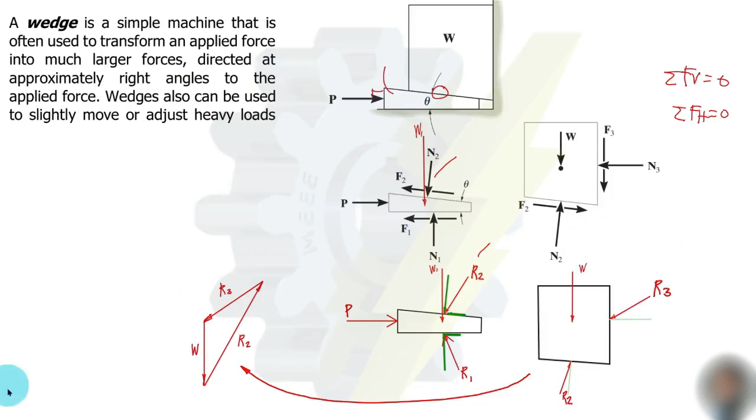Okay, so let us solve some examples. So our first example is from the book of Ferdinand Singer, problem 536, page 132. Determine the minimum weight of block B that will keep it at rest while a force P starts the block A up the inclined surface of B. So ibig sabihin ang impending motion ng ating block ay pakanan. The weight of A is 100 pounds and the angle of friction for all surfaces in contact is 15 degrees. So angle of friction, ibig sabihin yung ating phi.

So again, number 1, draw the FBD. So ito yung ating block dun sa taas, yung block A. So applied load or applied force ay force P. Wala namang given na magnitude to. Then yung weight ng A, so ito yun. Okay, so ang impending motion natin ay to the right. So therefore, ang friction force or yung ating resultant reaction ay ito. So i-resist niya yung force P.

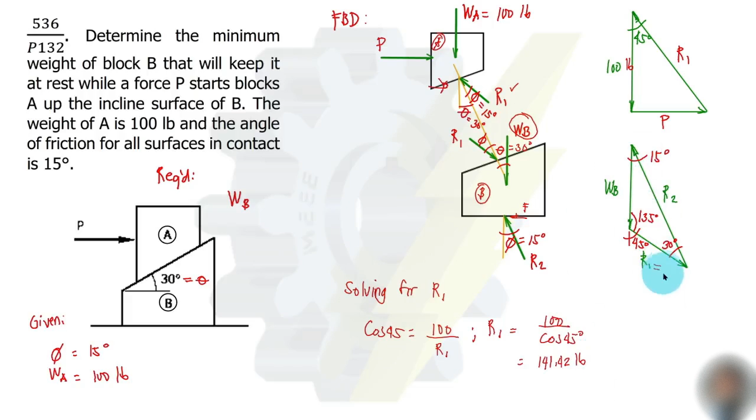Okay, so kung 141.42 yung ating R1, pwede na natin siyang gamitin dito sa force triangle ng block B. So, 141.42 pounds. The next, for WB, we can use sine law. Okay, so WB, yung ating unknown, over sine ng kanyang opposite angle, that is 30 degrees, equal to, so meron na tayong R1, 141.42 over yung sine ng kanyang opposite angle, so 15 degrees. So we can solve now WB, so that is 273.2 pounds.

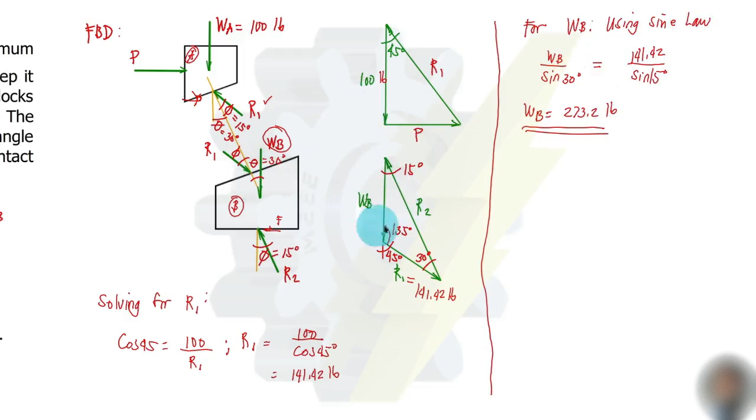Okay, so next problem. So again, from the book of Ferdinand Singer, problem number 541, page 133. Determine the force P required to start the wedge shown. So the angle of friction for all surfaces in contact is 15 degrees. So ang required natin dito ay yung force P and then yung given, yung angle of friction again, 15 degrees.

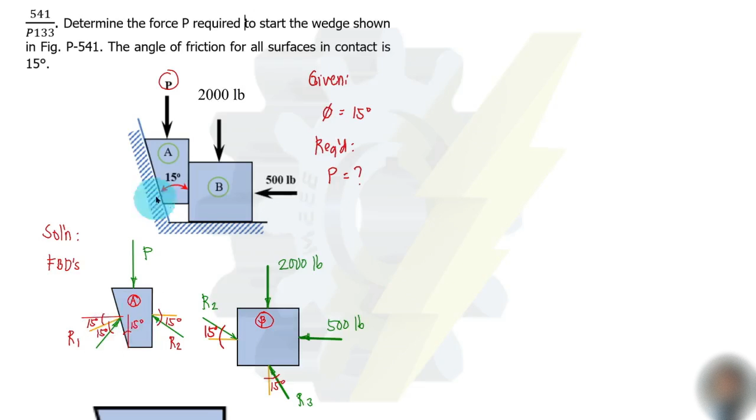Okay, so yung angle of inclination ng edge niya, so 15 degrees. So, kung isosolve natin yung angle doon, so basically, ito horizontal line, tapos ito vertical line. Okay, so kung ito 15 degrees, so therefore yun ay 75. And then from that, since normal line to, 90 degrees to, 90 minus 75, 15.

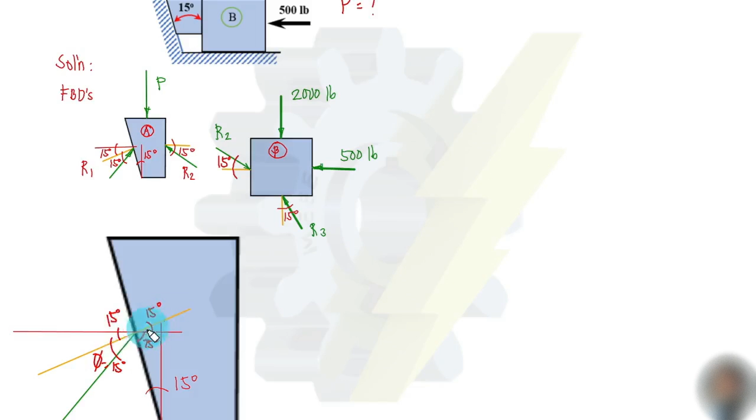So therefore yung angle nito, vertex angle, equal lang. So 15 degrees din to. So okay na tayo dito sa FBD ng block A.

Then kung dito tayo sa block B, so yung forces na involved, again, number 1, yung reaction kanina dito, yung R2, yun yung magiging applied force dito sa block B. Okay, so yung direction niya, baguhin lang natin. So ito siya, yung R2. So angle of inclination with the normal line is 15 degrees. Yun yung ating angle of friction.

So ngayon, yung reaction dito sa surface, therefore, so ito naman siya. So ito yung ating normal line, then ito yung ating angle of friction, 15 degrees. So let us denote this as R3. Okay, so ang objective natin dito, solve yung force P.

Pero dito sa block A, hindi tayo agad-agad makakapag-solve ng ating unknown na P kasi wala pa naman tayong either R1 or R2. So, kailangan natin i-solve yung R2 dito. Yung R1, di naman natin masasolve yan. So, yung R2 masasolve natin dito sa block B.

So, pwede natin i-start yung solution dito sa block B. So, ito, apat yung forces na involved. So, hindi tayo agad-agad makakapag-drawing ng force triangle. Pero possible pa rin gumamit ng force triangle by solving yung reaction or resultant nung 2,000 tsaka yung 500 pounds. So, isolve nyo lang yung kanyang reaction dito.

So, gamitin na lang siguro natin yung ating summation of forces vertical tsaka summation of forces horizontal para masolve yung R2. So, solving for R2 from the FBD of block B. So, we can take summation of forces horizontal equal to 0. Let us assume to the right positive.

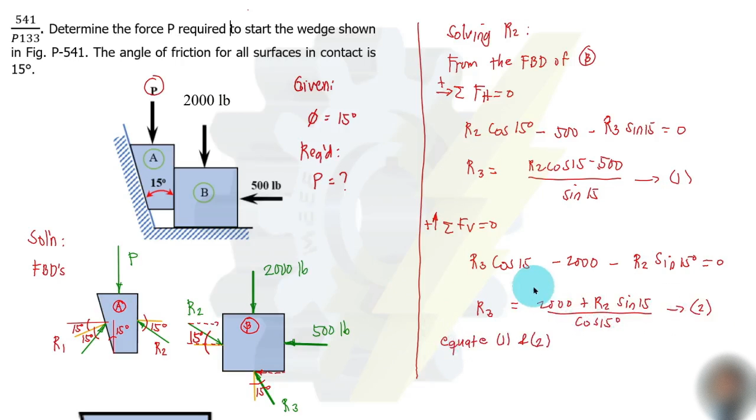Pero pwede rin syempre substitute yung equation 1 dito. So equate natin. So equation 1 yung ito. So dito pwede natin gamitin yung ating calculator. Pwede natin gamitin yung shift solve. Okay, so let us denote yung R2 na x na lang.

So alpha x multiplied by cosine 15 minus 500. Then yung right side ng equation, so yan ay 2,000. So yan, tapos na tayo sa right side. Then shift solve. So masosolve natin value ng R2 ay

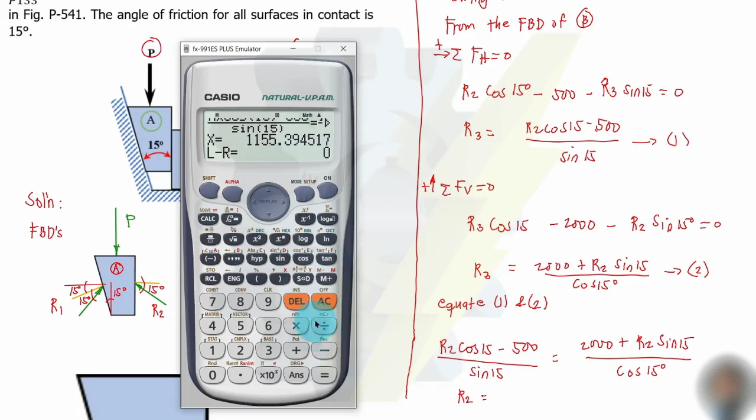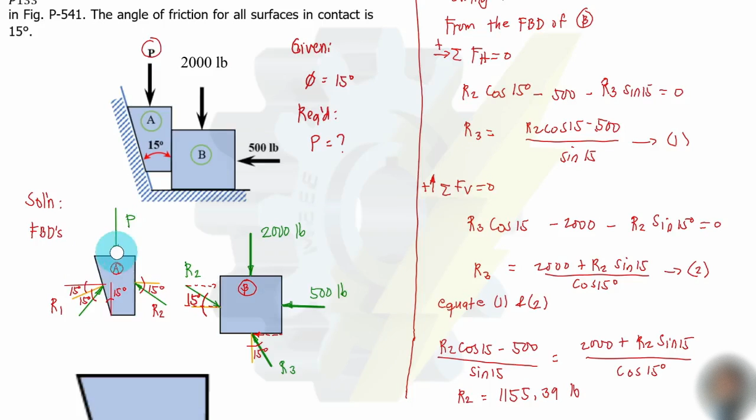1,155.39. So we are done with R2. So we can now solve for force P based dito sa ating FBD ng block A. So pwede natin i-drawing yung kanyang force triangle.

Okay, so otherwise, pwede tayong gumamit ng summation of forces vertical saka forces horizontal equal to 0 parang dito. And then equate nyo yung mga equation or substitute nyo yung isang equation dun sa kabilang equation para masolve yung force P.

So gamitin naman natin yung ating force triangle. So mag-drawing na lang tayo ng force triangle and then we can use sine law or cosine law. So given naman yung mga angle of inclination. So start tayo dun sa force P pababa, then yung R1 up to the right, then yung ating R2.

Okay, so yung P ito yung ating force P, then ito yung ating R2 equal to 1,155.39. So ito yung ating R1. Okay, so angle of inclination, yung R2, alam natin yung angle of inclination niya with the horizontal ay 15. So therefore, ang angle of inclination niya with the vertical ay equal to 75 degrees.

Then for R1, yung angle of inclination niya with the horizontal again, so 15 plus 15 lang, so 30. Okay, so ito ay 30 degrees. O pareho lang dito. Okay, so therefore ito ay 60. And then ito, syempre, ay 15 degrees. So solving for P. So we can use sine law.

Okay, so yung unknown ay P over yung sine ng kanyang angle, ito 30 plus 15, so 45, equal to, so meron tayong R2. So ito yun, so 1,155.39. And then yung kanyang opposite angle ay 60. So sine of 60 degrees.

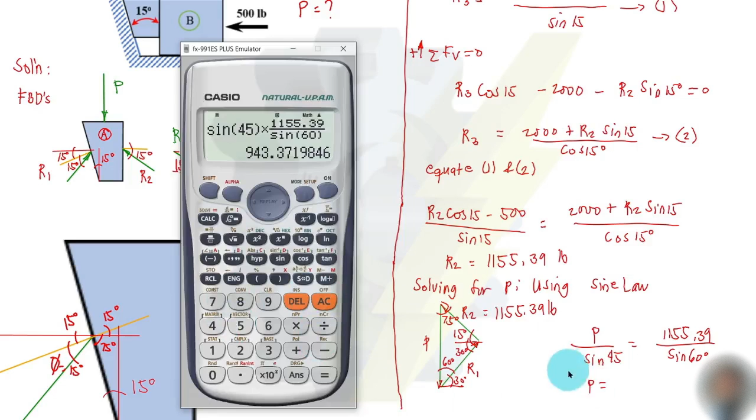So P here is simply equal to, gamit yung ating calculator, 943.37 pounds.